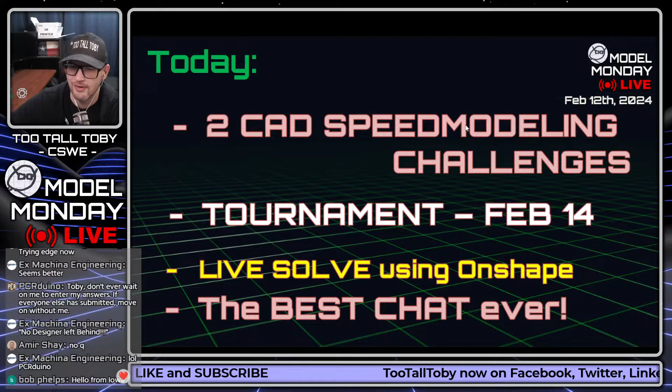So we'll take a look at this in Onshape live today. And of course, we're going to have our speed modeling challenges for all of you. So let's go, let's get into it here.

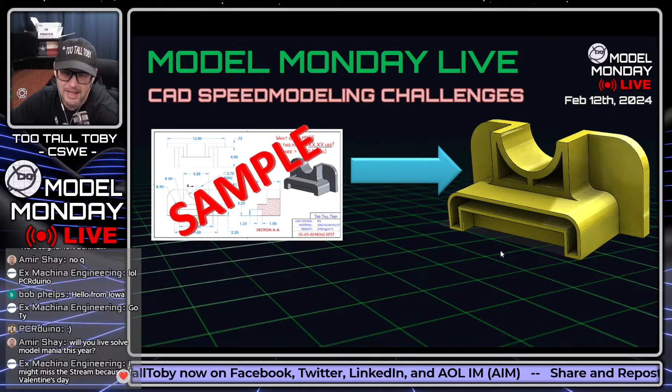We're going to take a look at this sample file. This sample file is going to show us what we're going to be doing today, which is showing you a 2D print and asking you to calculate the mass and then enter the answer in the chat. Once you know what the mass is, enter that down in the chat. The basic rules are that you can use any CAD package as long as you can input the density and output the mass.

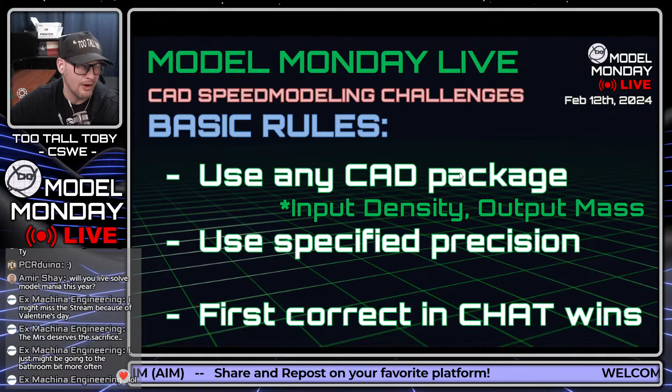Make sure you use the specified precision. I think the prints today are all in millimeters in whole units, so I think you're okay there. And the first correct answer in the chat will be declared the winner. We'll win the points, get on the leaderboard for February on the Model Monday Live webpage.

Here's the units that we use. If you're here for the first time, you might want to take a screen capture of this page. Grab the unit system, grab the units, grab the densities, especially because the densities are different for the different CAD packages out there. So you want to make sure that you have a material, custom material.

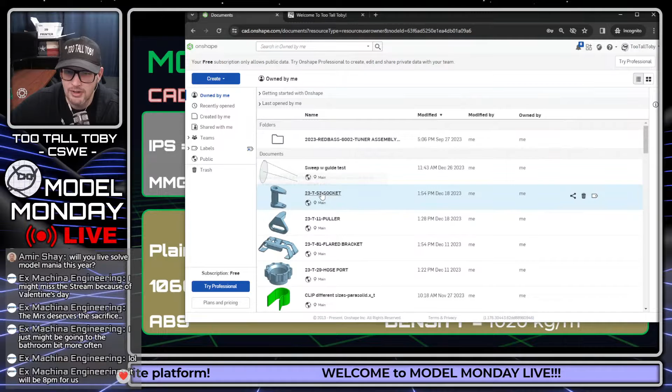You'll see a little bit later in the presentation, we're going to be doing some live Onshape here. And we're going to see that in Onshape, what I've done is I've gone into my materials library and assigned a custom material. So I've got a materials library here. You can see there's the standard Onshape materials library, but then there's also a custom TTT library where I've got my ABS, 1060 aluminum, and plain carbon steel.

So this is something you're going to want to make sure that you do for your CAD system, so that you've got a reliable source of materials with the correct material density hooked into each of those. So just keep that in mind as we are going through these Model Monday Live challenges.

Karam is exactly right in the chat, saying in my Autodesk Inventor, I don't have 1060 aluminum. Yeah, exactly, you're hitting the nail on the head there, Karam.

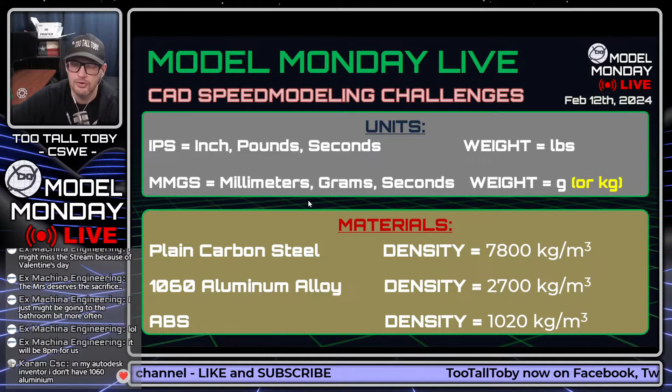So what you want to do is make sure you create a custom materials library, and that way you can add these materials with these densities. Otherwise, you're not going to be coming up with the correct mass. So custom material, how to create a custom material - very important skill for all engineers to know how to do, because it will come up in your career. So make sure you know how to do that, make that custom material, and then you'll be able to use that over and over again.

In the meantime, you could manually input a density. Most CAD packages let you do that. I don't know how to do it specifically in Inventor, but I'm sure that there's a way to input a custom material density for the model in question.

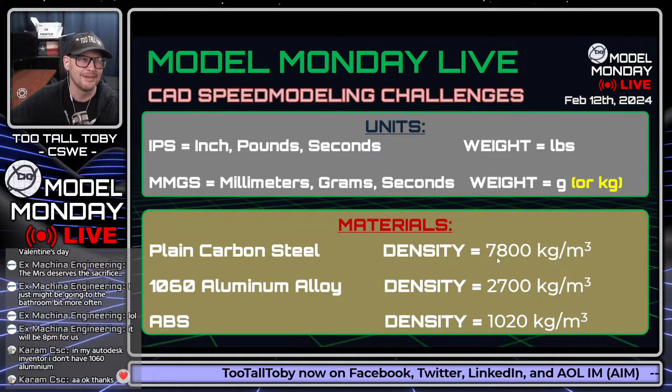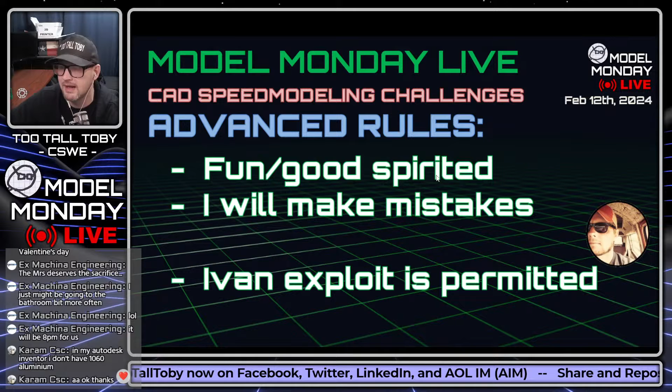All right, the advanced rules are this is meant to be fun and good-spirited. I will make mistakes from time to time, and the Ivan exploit is permitted if you happen to find a spot to use it. This first model we're going to get into here is going to begin as soon as I go to full screen. You're going to take a screen capture, move it over onto your second screen, and attempt to create this model. And this challenge begins in 3, 2, 1, go.

Ali Ammouri is here. What's up, Ali? Welcome, welcome, great to see you here in the chat. Says hello, everyone. Hello, my friend. How are you? And welcome to the chat. Thank you, thank you, thank you.

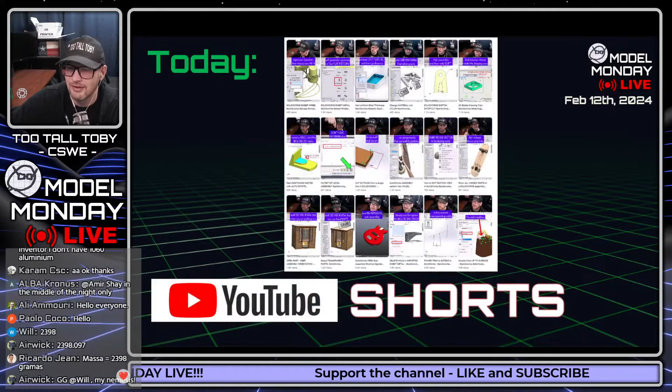First of all, the shorts experiment continues. It continues to grow, like a fungus, just continues to grow. Every week we look back and we got 7 more. And that's because we're doing a new short every single day.

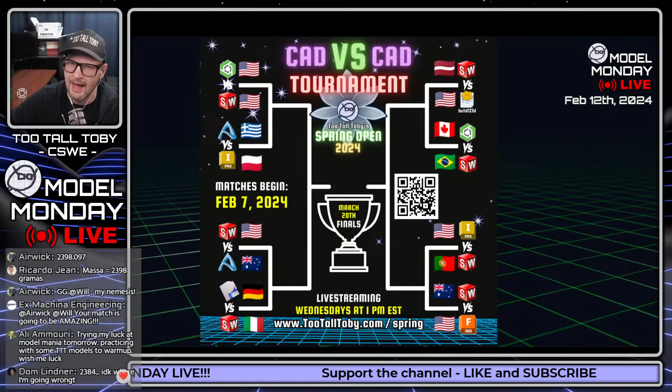The Spring Open tournament has officially begun. We got to watch last week as our friends Imants and DustyTechKnow squared off, and then we got to see Mr. Alex go up against Jern. They were such awesome matches, so excited to see those going down.

And I got your message on Discord, Jern. I can't remember if I responded to you or not. It was a little bit of a crazy weekend with the camping this weekend, but it was a great weekend, and I will definitely get back to you. We're gonna have Jern on as a special guest doing some build123d.

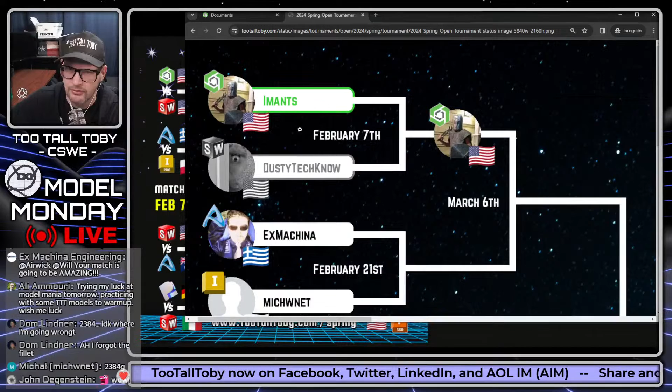If you didn't get to see that, be sure to check it out. Go to TooTallToby.com, take a look at the page Tournaments Spring, or TooTallToby.com/spring, and click on this flyer. When you click on it, it actually shows you the live update of the tournament. You can see here that Imants was able to emerge victorious against DustyTechKnow, and Mr. Alex was able to emerge victorious over Jern.

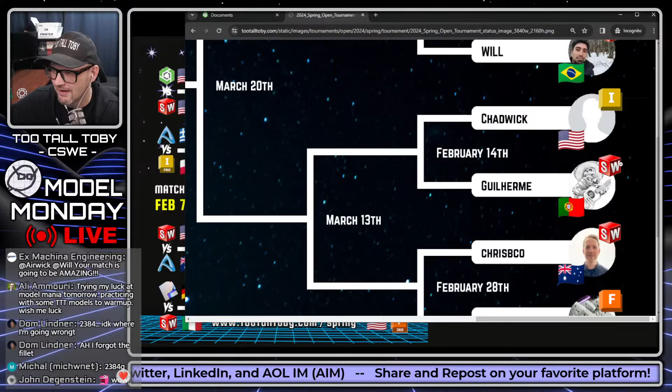So our next matchups are going to be next week. We're going to see Dom using SolidWorks going up against Ty using Alibre, and we're going to see Chadwick using Inventor going up against Guilherme using SolidWorks. Very, very excited to see these matchups.

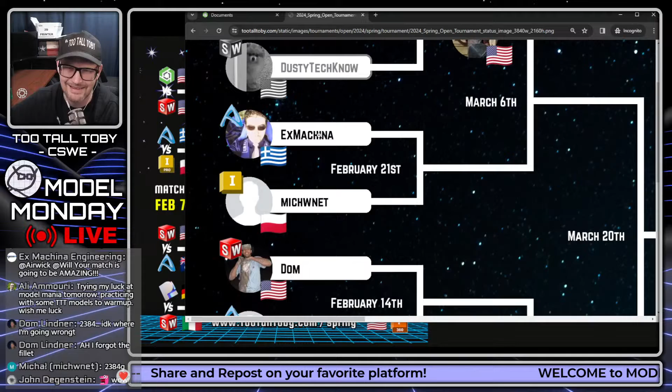We got Michal michwnet in the chat, and he's going to be using Inventor here in a couple of weeks, February 21st. Very cool, I just saw his answer come in, and he's here on the tournament bracket, ready to rock. And of course Ex Machina also in the tournament bracket and in the chat today. We can see some friendly discussion going on amongst the people in the tournament.

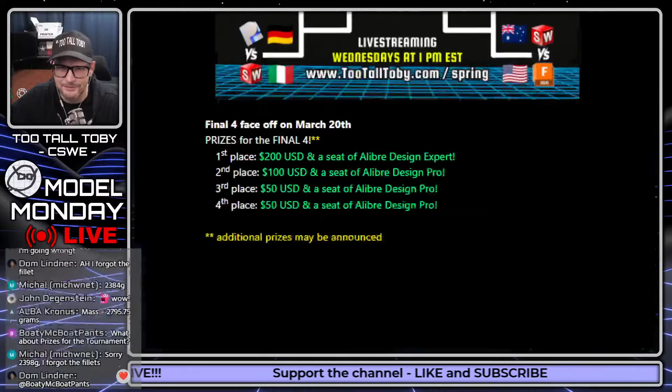First place, $200 USD and a seat of Alibre Design Expert. Second place, $100 USD and a seat of Alibre Design Pro. Third and fourth place, $50 each and a seat of Alibre Design Pro.

How cool is that? So we got some pretty good prizes here for this tournament. Good luck to all our runners. Ex Machina says that's amazing. I agree, that is amazing. Awesome prizes here. Very excited to see who emerges victorious in this tournament.

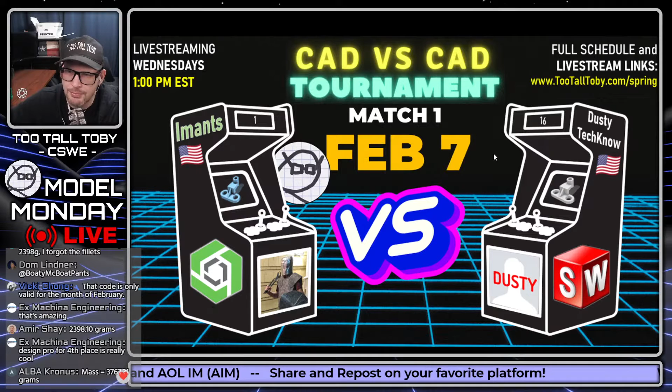Like I mentioned last week, February 7th we saw our kickoff match, Imants versus DustyTechKnow. We saw Mr. Alex versus Jern. Really, really fun matches. Full live stream is on the website, on the YouTube channel, you can check that out.

This week, in 2 days, February 14th, Dom using SolidWorks versus Ty using Alibre, and Chadwick using Inventor versus Guilherme using SolidWorks. Very excited to see these matchups on Wednesday. Be sure to check them out and share it with your friends in the world of CAD. We got lots of good matches coming up in this tournament.

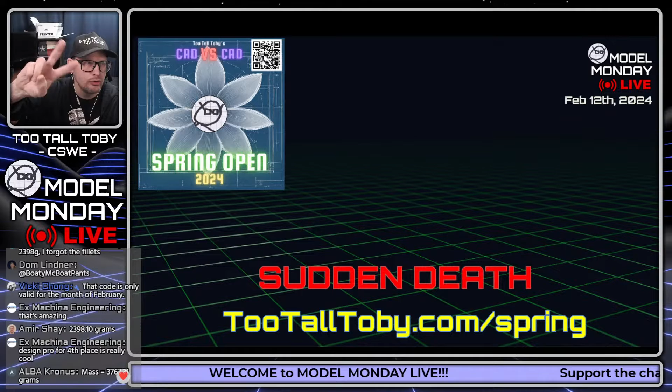16 people, Wednesdays at 1 p.m. No sheet metal, that's the big difference to the rules in the open tournament. And of course we are also implementing sudden death in this tournament. If there's two matches that go to a push, then we go into sudden death. We have some special rules to make sure that the tournament keeps moving forward.

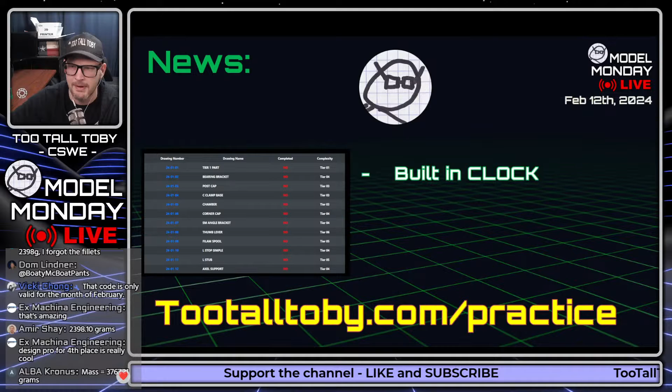I mentioned that I posted a video this morning with practice models updates. So if you go to TooTallToby.com/practice, you'll see that all of the practice models are available. There's a built-in clock, there's a tiered level difficulty, there's a leaderboard, you can track your progress, and it's mobile friendly. So you can check out TooTallToby.com/practice and get all of your 2D to 3D fixes in there.

He says, I'm Mr. Alex from a notebook. Oh okay, cool, all right good. Double practice, I like it. Double practice, I like it.

So yeah, you guys can check out TooTallToby.com/practice. It's an awesome website, it gives you a chance to really get in there and continue to hone your skills. And we are adding new models every week to that website. So check it out and keep coming back and checking for more.

And finally I got to mention training. We got TooTallToby.com/training up and running. If you go here, you can see that we currently have 4 classes, although we're about to add 2 more to this list. And you can also see that we are scheduled to run our first class. We have 2 students signed up so far, but we're looking to get some more into that class. It's going to run on Thursday, February 29th, and it is Toby's Advanced SolidWorks part design.

So we do advanced fillets and chamfers, splines, fit splines, 3D curves, helices, split lines, 3D sketching, sweeps, lofts, pierce constraint, delete face, move face, multi-body commands, advanced patterns, and more. Lots more.

This is a live class with me, so it is live training. It's over the web, but it's not pre-recorded videos or anything. So you also get the ability to ask me questions. You get access to an exclusive area of Discord, and you also get the training files, a training manual with this awesome cover, and the certificate of completion. So be sure to check that out.

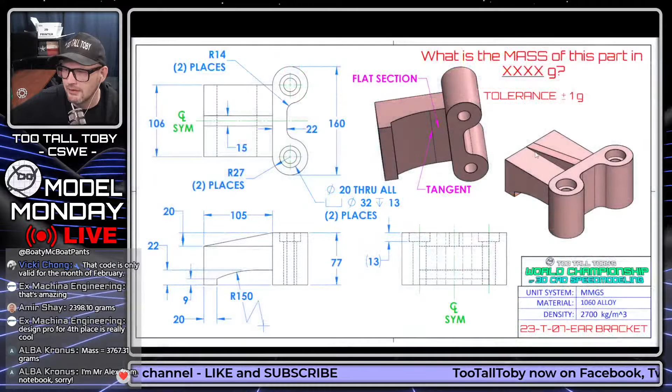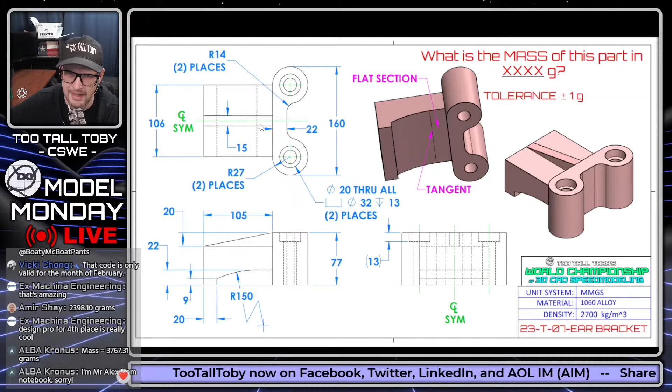All right, our first answer. A little bit of an easier model, I don't have this one tiered yet. I think this would probably be a tier 4 model. We could get most of this geometry probably in one sketch, and then maybe have to do a second sketch to come in from the side, but other than that it's basically a one sketch model. You'd have to know how to use your contour selections to do it if you were going to sketch it all from the top, and you'd have to know how to do some slightly more complex relationships like tangency and dimensioning to the tangent points to make things a little easier.

But let's take a look at what our amazing chat came up with as far as an answer goes. Actually, I think we can just leave this here and do one of these. Oh yeah, love it when it works. Love it when it just works, such a good feeling. All right, I will move this over a little.

All righty, let's go, let's see what we came up with. I saw an answer coming from Will. Will is going to get on the board possibly this week or stay on the board. Wait, did Will get a point last week? Let's look here, Model Monday Live, February. Will is already on the board for 1 point. Will and Victor K. Let's see how it goes today.

Will comes in with an answer, 2, 3, 9, 8. Very nice. Will is in the tournament as well, guys.

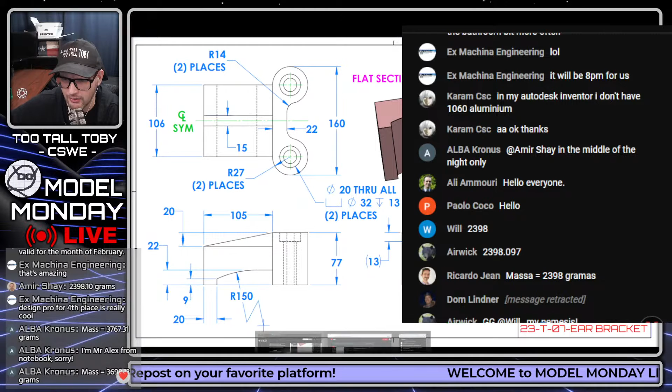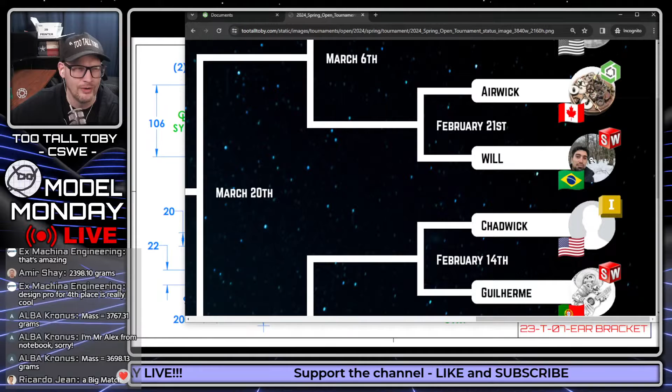All right, this is what I like to see. Oh, I don't know if you guys could see that, I might have had it blocked with the chat, sorry, let me do that again. Here we go. February 21st, Will versus Airwick, Canada versus Brazil. I like it, I like Airwick's user logo there too, that clock, all the clock pieces, that's pretty cool. It's kind of ironic too that Airwick is in Canada, but Will has the image with all the snow and the trees, you'd think that would be up in Canada with all the snow and the trees. So all right, cool, I'm excited to see that matchup. I think we're all very excited to see that matchup.

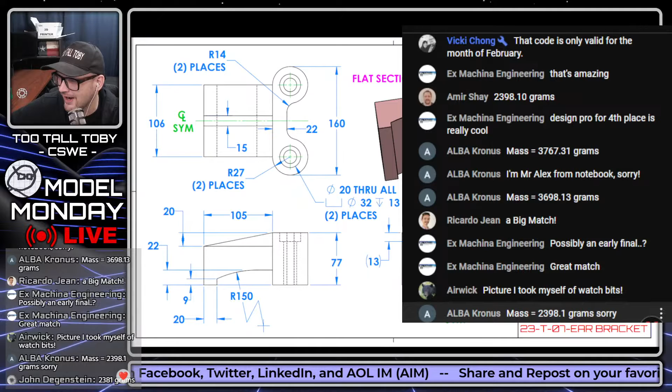Let's see here, Will comes in with an answer, 2, 3, 9, 8. Airwick right behind him, 2, 3, 9, 8. Ricardo Jean coming in 2, 3, 9, 8. Very nice. Dom coming in down here, 2, 3, 8, 4. I don't know where I'm going wrong. Hey, it's all good, you can correct as many times as you want here in the Model Monday Live episodes. You don't get that luxury during the tournament, but you do during Model Monday Live. Michael coming in 2384 as well. Let's see here, Alba Kronus, Mr. Alex coming in 2795, mixing it up, I like it. Let's see here, Michael revising 2398. Very nice. Alba revising. Amir coming in 2398. And Alba coming in 3767. Very nice. 3698 revising. I like it. And finally 2398 says grams, sorry, don't worry about it, you can do it as many times as you want. And look at John coming in here 2381 as well, I like it. Lots of diversity here as far as these answers go.

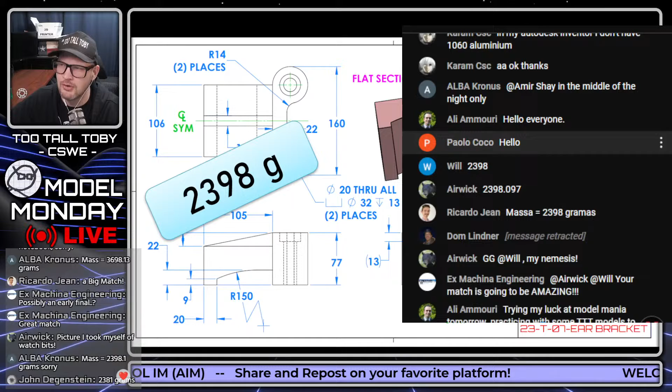Let's see what we ended up with as the correct answer. The correct answer is 2398. So that point is going to go to Will, taking him up on the leaderboard, 2 points for February. Very nicely done, Will. Let's all give Will a GG in the chat and a GL on Feb 21.

GL Will on Feb 21, you're going to destroy that other guy. Just kidding, just kidding, Eric. All right, GG to Will.

Congratulations, very nicely done, that was speedy. Boaty McBoatPants saying, wow, look at that leaderboard updated already. That's very nice, Boaty McBoatPants.

I like it, let's look here. Model Monday, look at that. Will's already got his point here. It's like we got AIs running in the background, scrubbing this thing and coming up with our answers right away for us. I love it.

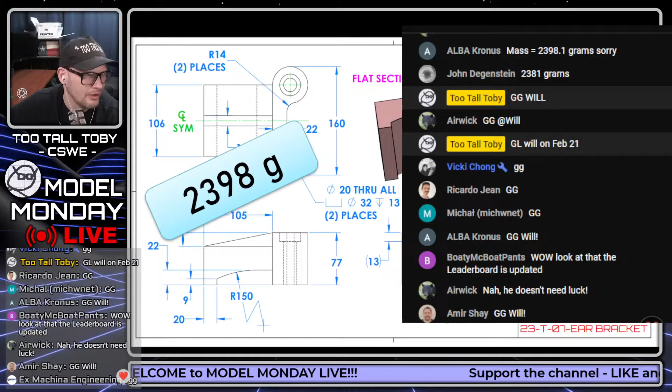All right, let's get into our second challenge here. And guys, guess what, we got a new model for you here. Model Monday Live, I figured it was going to be a little bit light today. I know there's some conferences going on today, this week, so I figured we'd be a little light.

So I figured something special for all of you. We're going to do a brand new model here. This one doesn't come from a past tournament, doesn't come from a past episode of Model Monday Live. Brand new, just for you. I tagged it as a tier 5 model. I don't know, you guys are going to have to tell me. I thought it was tier 5 because it has some trickiness to it. Whenever there's trickiness, it kind of gets bumped a little bit. So good luck, here we go.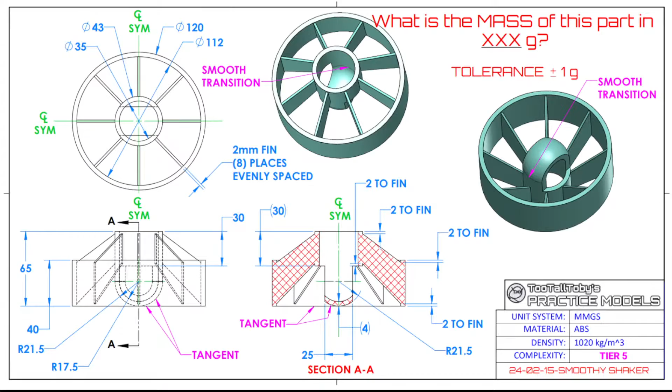All right, let's get back into it here. Here we go guys, Model Monday Live continues. Good luck to all of our runners today.

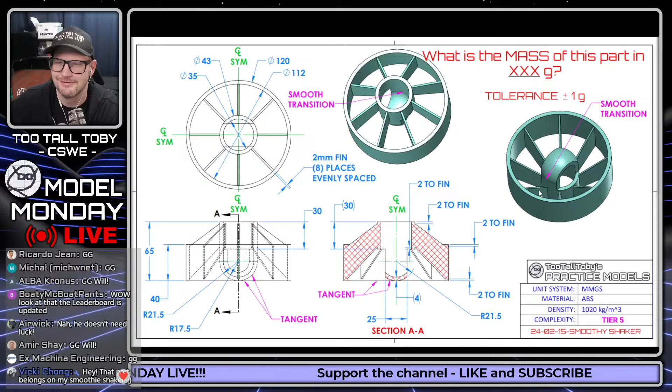Now I have mentioned conferences a couple of times this week, but sometimes it's time for an all-new type of conference. We are in the process of putting together an all new type of conference. I've mentioned this the past couple of weeks, it's still in a codename phase, codename SolidBox World, but this is going to be something special. This is going to be representation from multiple CAD systems getting together, talking about the differences, talking about the similarities, talking about what makes one CAD system maybe a better choice for you, and a really unique event here to kind of compare and contrast multiple different CAD systems. So be on the lookout. SolidBox World, put it in your calendar for all of Q4 2024.

Just say sometime in here, we're going to have SolidBox World. I got to mark this in my calendar, I'm marking off the whole quarter. We are very excited to get this all locked down to officially announce. I think the official announcement's going to come here in another week or so. But for now, you Model Monday Live crew, chat crew, you guys always get the inside scoop.

Da Vinci is here in the chat. What's up Da Vinci, welcome, welcome. We're just doing the second challenge, so if you just roll back the video a little bit, you will see the second challenge has begun.

And here we go, let's keep going on here. What are we going to do today? Whoops, this isn't right, hold on, we're doing a quick change here. We're already at this part. We are crushing this schedule today, this is awesome, I didn't realize we were already this far.

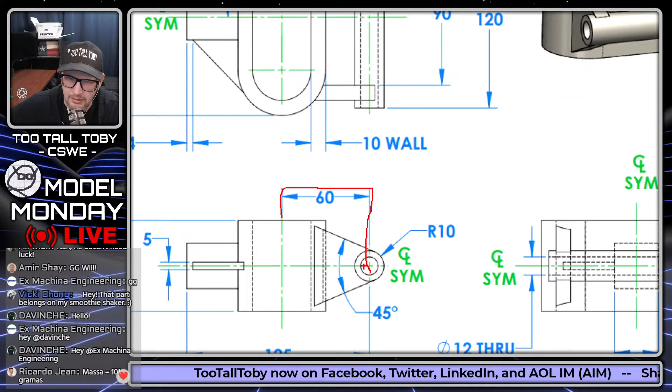Like this dimension here, this 60 is coming off of the center of that slotted area, and then this 125 is coming off the back of that. So you could almost say that this dimension here is also coming off of that centered location.

So I think that because of that, it would make sense to have the origin, the center of the part, maybe located here. And the way that you determine that, the way that you establish that, is just kind of by experience, but it's also by looking for things like, is the model symmetric? The model has symmetry in this direction, so the origin's probably going to be somewhere along this line.

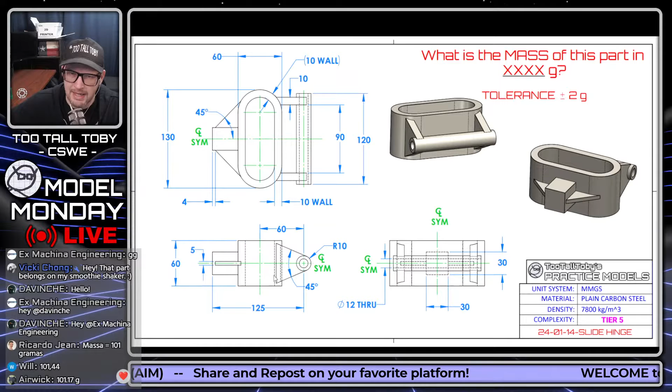And then looking for key anchoring dimensions, like we talked about a moment ago, that 60 and the 125 dimension are going to be anchored in on that point. So we could say that we're going to put the origin here, and once we determine that, we could really create a lot of this geometry on that initial sketch plane.

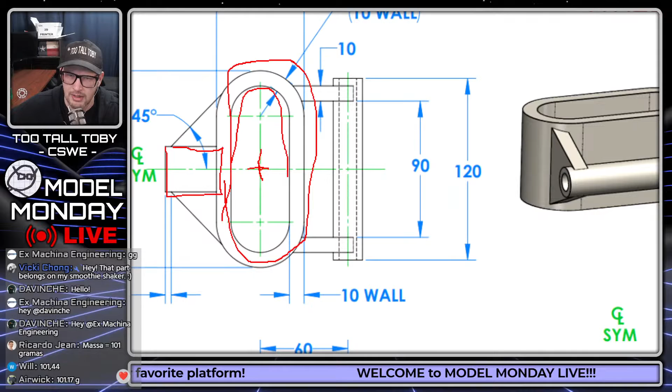For example, I could create this rectangle shape here in that initial sketch. I can certainly create these two slotted shapes here in that initial sketch. And I could also create the sketch for this rib here.

Now, I think I'm going to take advantage of symmetry, and I'm going to mirror that rib across, so I don't really have to worry about drawing it twice. And if that's the case, I could also take advantage of this shape here and mirror it across.

So I think I'm going to create this rib here, and then also create one of these kind of triangular shapes here, and then mirror both of those features. Once I mirror both those features, the only thing left to do is going to be to create this boss here.

The final thing I'm going to say about a model like this, and again this just kind of comes from experience, is that I think what I'm going to do is create this outer shape first, and extrude it as a solid.

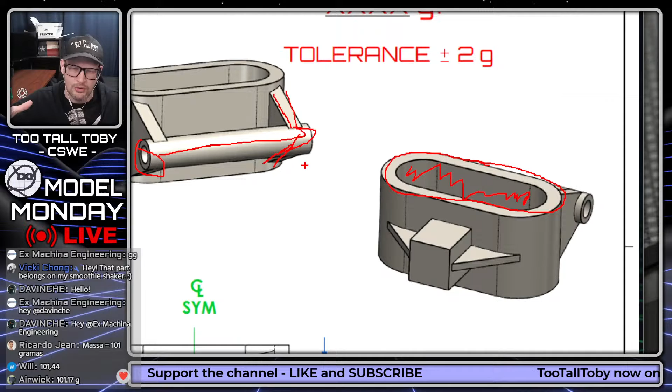And then later in the model, towards the end, I'm going to go through and cut this inner shape. The reason you do that is because it just makes it easier for you to overlap geometry onto that inner wall. Sometimes it's not necessary, especially with a model like this. When you've got a very thick wall, it's probably not necessary, but it is kind of a good best practice, and it's a good technique to share here during this Model Monday live solve.

I know that I took a couple of minutes there to come up with a game plan, but I think it's definitely important, and it's going to help me throughout the rest of the design process. That's why we always do that, we come up with a game plan, and then if we need to pivot along the way, we certainly can. I'm going to take a screen capture of this and move it over to my second screen.

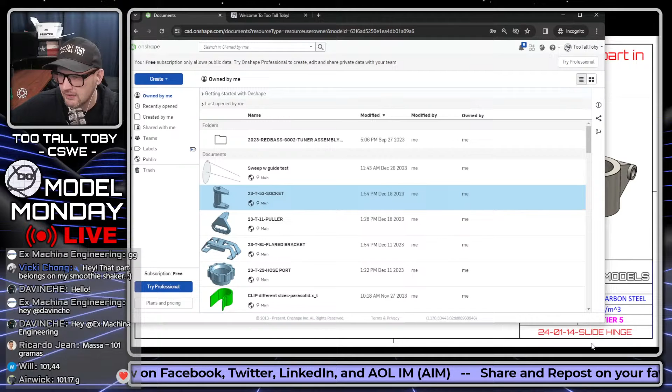I'm going to get into my Onshape modeling environment here. Onshape is entirely browser-based, so it doesn't matter what operating system you're working on. I'm building a second computer here to use in a more mobile environment, and it's really nice to have Onshape on both computers. Really, it's not on either computer, it's on the browser. It's just nice to jump from one computer to the other and keep my place, not having to worry about transferring files or anything like that, or my learning - all of my Onshape learning is in the same account. It's a real nice advantage of being entirely browser-based.

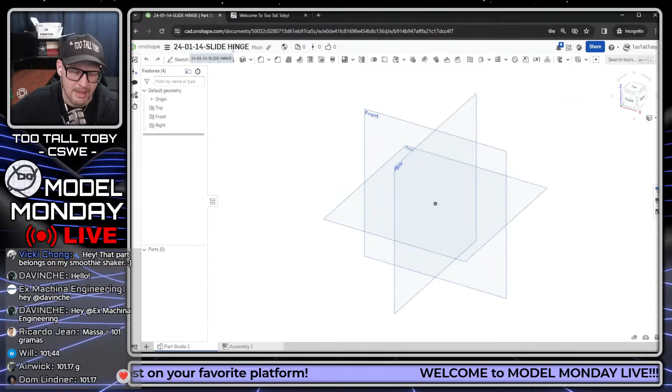So I'm going to create a new document here. I'm going to call this document 24-01-14-slide hinge. If you are an Onshape user, this is being created in the public space, so you can search for this name and find this document, and look and see how I built this. Just like we talked about in the game plan, I'm going to start out by creating a sketch here on the top plane.

Once I get into that sketch mode on the top plane, I'm going to start out by creating that slot geometry, that double slot geometry, so the 60 by 130 slot geometry.

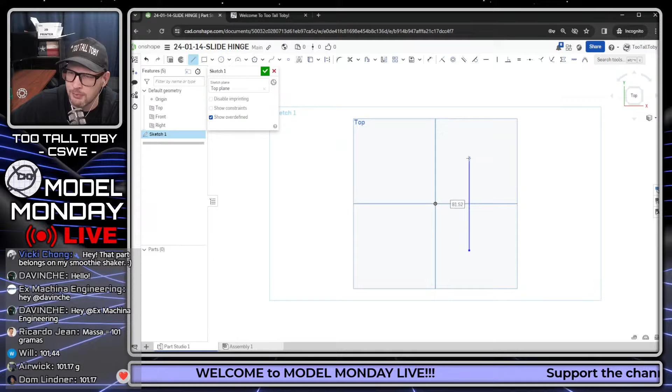To create a slot in Onshape, we start out by creating the center line. This is going to be 130, really minus 30 for the radius on one end and minus 30 for the radius on the other end, leaving us with a 70 millimeter long line.

Then I'm going to take that line and choose this command up here, slot. We fly out the command for offset, and then we can choose the command for slot. At this point, we can click in the background to finish that slot command, and then we can change this - this is a diameter dimension, so this is going to be 60, the diameter for that slot.

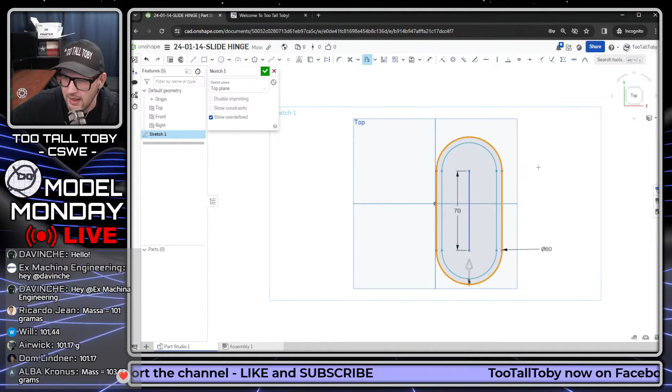We can also, at that point, go into an offset command. So I could do a right mouse button select and say tangent connected edges. Then from there, I could jump into an offset command, and this is going to be an offset at a distance of 10 millimeters to capture that wall. Now I can just pick this line, pick the origin, and then press Shift M, which is the newer hotkey for midpoint.

In some CAD systems at this point, we would have to take this center line and make it for construction, but we don't have to do that in Onshape. Onshape is kind of pre-cooked to work with contour selection, multiple contours in a sketch. So it just works.

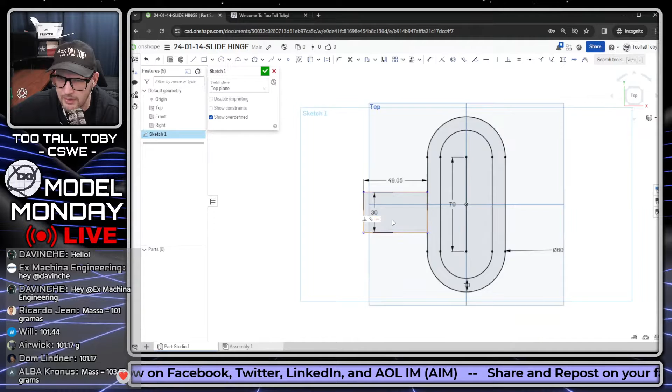Now I'm going to create this sketch out here for the rectangle. I don't know what that dimension is, so I'm just going to leave it whatever it happens to be - I'll just press enter. Then for this dimension, this is going to be 30. And there we go.

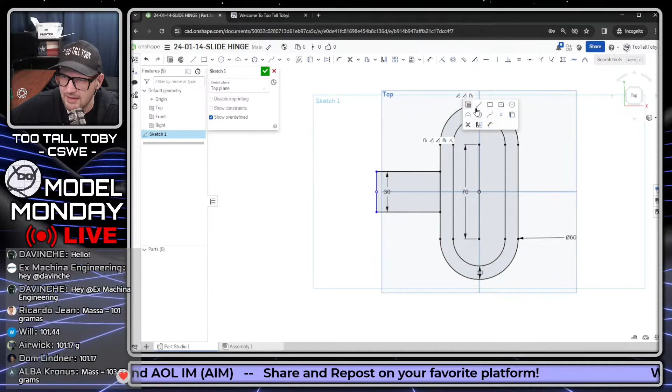Then what I could do is align this rectangle onto the remaining geometry. There's a couple ways we could do this. A lot of times I'll just drop in a point here, and then take that point and the origin and make them horizontal - just take those two and press H. Then this dimension, that's not the correct dimension - it's going to be a dimension from the origin to that line, and that's going to be our 125 minus 60 that we talked about down in that front view.

Now the final thing that I need to sketch here is just a line that I'm going to use for the rib command. That line is going to have a dimension of 45, and then it's going to have a distance here of 4 millimeters.

Now, the truth is that I like to keep my sketches simple, and this is kind of pushing it for me. This is getting a little too complicated. If something goes wrong, I'm going to probably need to spend a lot of time troubleshooting, so I really don't want to go too much further than this with this sketch, or make it too much more complicated.

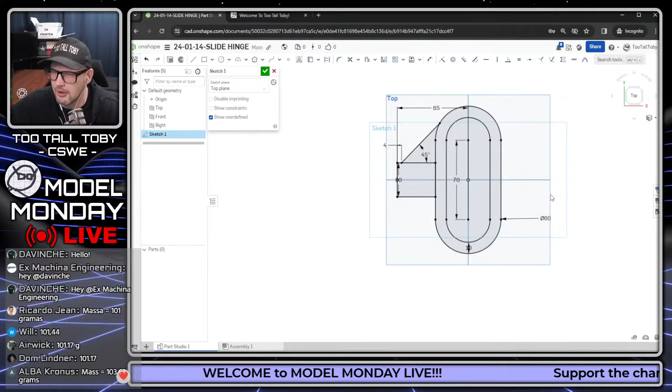Certainly I could get over here on this side of the model and start sketching that other geometry, including it as layout geometry as well. But again, I like to keep my sketches simple. I don't want to go too deep into an overly complicated layout sketch for this model.

So I think at this point I'm going to jump into my extrude command and choose the geometry to extrude here. I think I'm going to choose this region and this internal region like we talked about before. That's going to come up to a height of 60, and I'll press tab and get down here to symmetric, then press enter and finish out that part of the command.

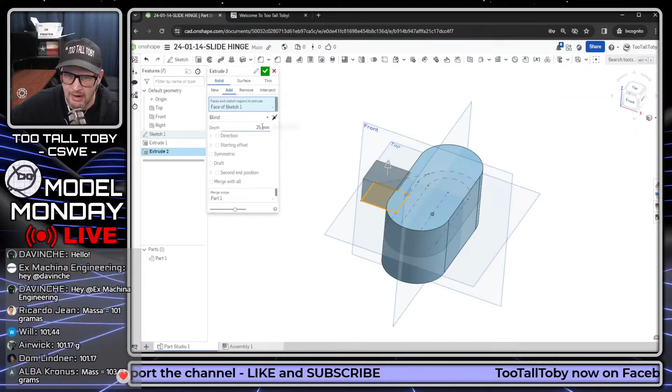Now I can show that sketch. So over here in the tree, I'm going to show that sketch, and then use that sketch again to do another extrusion. This time the extrusion is going to come from this rectangular area, going to a height of 25. Again, I'll press the tab key here and tab down to symmetric, then press enter. And that creates that kind of rectangular shape sticking out the front.

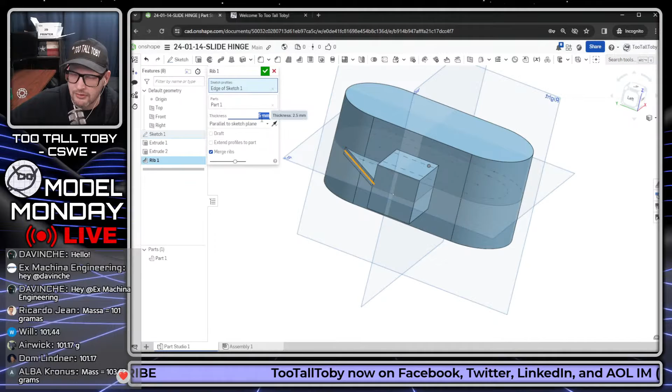Now I'm going to select this line here and jump into a rib command. By pre-selecting that rib, it just takes me right into the command. That's going to be at a thickness of 5, and we can see here that now allows me to create that rib with that thickness of 5. Boom, done with that feature, ready to move on.

So now we're going to jump into those kind of triangular shapes that were sticking out the back there. We need to create one of those triangular shapes, and then we'll be able to mirror that. Once that's mirrored, we'll create that final kind of circular boss running through there.

So I'm going to take the front plane, right mouse button on the front plane, and choose offset plane. This is going to be an offset at a distance of 90 over 2, and we're going to offset the opposite direction. And there we go. Now we're going to select that face and begin a sketch, and I'm just going to get normal to that sketch plane to create this geometry.

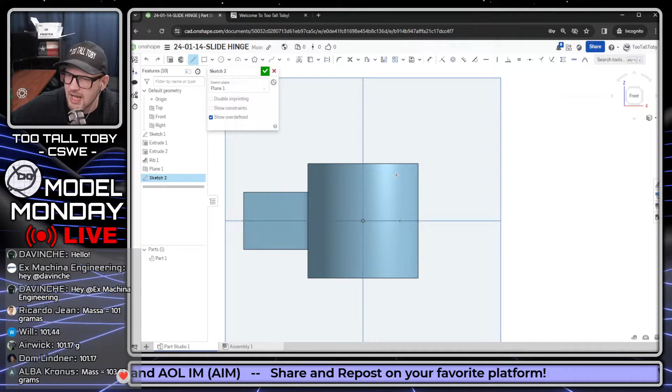So for this geometry, I'm going to begin a line. I'm going to come down, come back, kind of touch the end point, jump into a tangent arc, and then create another tangent line coming off of that. I'll just connect those two. We're going to make this vertical, so I'll press V there.

We'll take these 2 points and make them vertical as well, and then take the origin and this point here and make them horizontal. That should establish, because I made those 2 points vertical — this is a little trick when it comes to tangent arc, line, tangent arc, so line, arc, line.

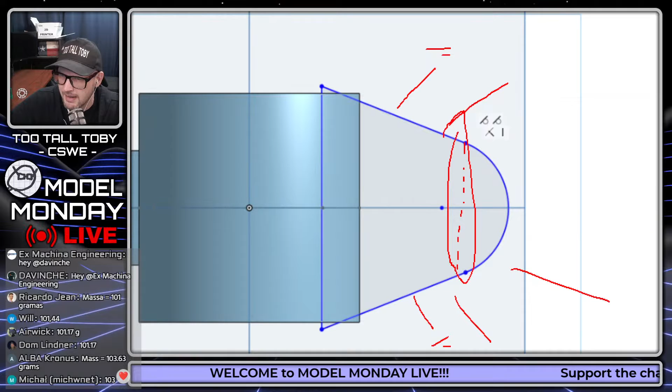If you take these 2 points here and make them vertical, that will give you essentially a symmetric relationship. You could also take these 2 lines here and make them equal — that's another way of doing it. But you can also just take these 2 points here and make them vertical. It's a nice, quick, easy way to create pseudo symmetry between that — it's like a geometric symmetry.

So now this is going to have a radius of 10, and the angle here between those 2 lines is going to be 45. Now the distance from this line to the center of that arc is going to be 125. And now this is where it's kind of nice to have the internals of this model still solid.

Because I don't really need to worry about where this lands — in fact, what might make the most sense would be just to create a coincident relationship between this and this. So if I make those coincident, now I know it's going to be buried inside there, but it's never going to stick out the top or out the bottom.

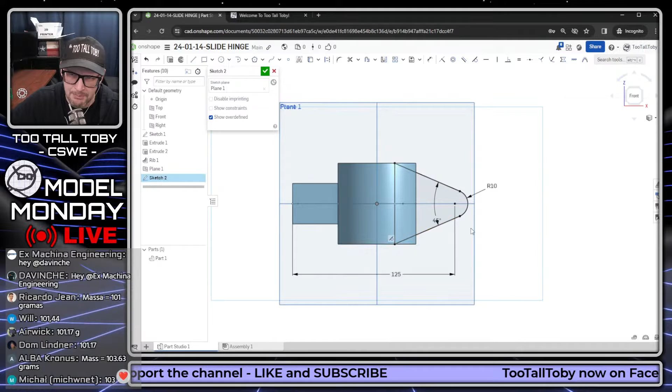And then what I could do is jump into my extrude command. So we could take that and turn it into an extrusion of 10 millimeters, and that's going to go the other way.

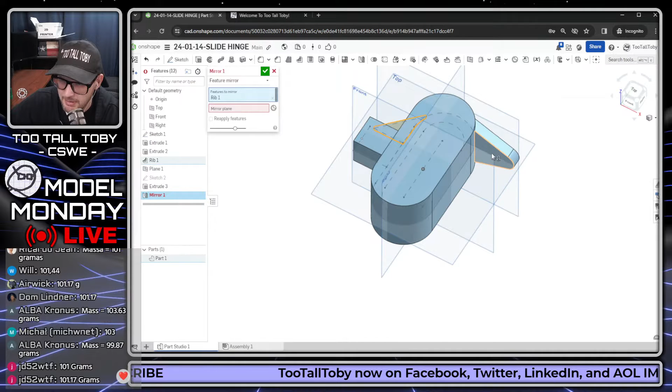And now I'm ready to jump into my mirror command. So mirror, and this is going to be a mirror of features. I really could mirror the whole part as well, but I'm just going to do this as features. So I'm going to mirror the rib and that triangle shape, and the mirror plane is going to be the front plane.

We can see that these are showing up in red, and sometimes if they show up in red in Onshape you need to check this check mark here, reapply features. It's nice, Onshape gives you that color coding, like hey this isn't going to work - if you hit the check mark you're going to end up with an error. So I click reapply features, and now I hit the check mark, and now boom, we are good to go.

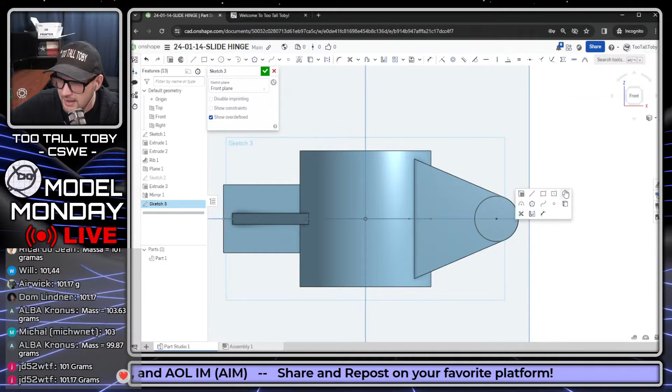So now at this point, I could go front plane, begin a sketch, just get normal to, just because we like it normal to. And then we're going to say that these 2 arcs here are equal and concentric - we'll make those 2 concentric, and we'll also make those 2 equal. A couple of ways we could do that. And then we've got our internal arc there as well, and that internal arc is going to be at a diameter of 12, I think. Yep, 12. Thought I saw that earlier.

And then we'll do an extrude there, and that's going to go to a depth of 120. Once again we're going to press tab and get down to symmetric. This could be the whole thing, or we could leave some of it out. The nice thing about doing the whole thing is that one of the nice things about Onshape is you can extrude right from a face. So then I could pick this face, do an extrude, and make that a cut extrude - remove through all, and then I'm just done. It just blasted through the whole thing there. So it's one way of doing it.

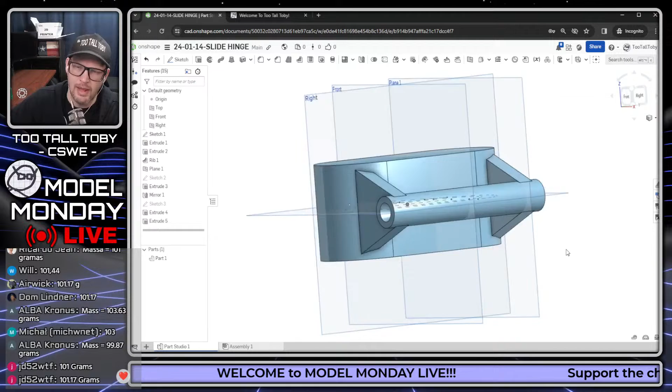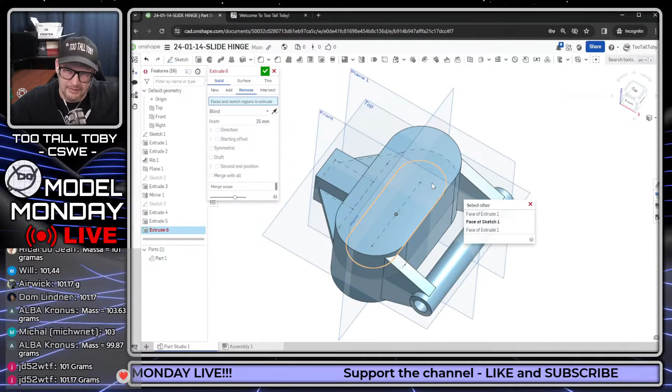Another way would be just to reuse the sketch like we did earlier. So for that final feature, we're going to go into an extrude, and this is going to be a remove. Then for the faces and regions to extrude, we're going to use the tilde key, the key up above the tab key, because that's the select other in Onshape, and that lets you pick a region buried inside of the model. It's a little hotkey, you use that tilde key. So I'll pick there, and that's going to go through all and symmetric, hit the check mark, and there we go. We can do a Shift P to hide all of our construction geometry.

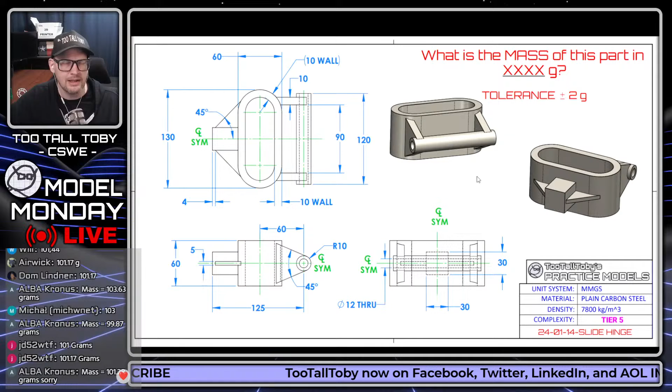So at this point we're going to go back to our PowerPoint. And did we get it correct? Drum roll please, let's see. Did we get it? We did get it correct - we just got it correct on an old slide, but we did get it correct. 2030 grams is the correct mass of that part. So we did it, yeah. GG Toby in the chat, GG Toby, and that is correct. 2030 grams is the correct answer for this model here.

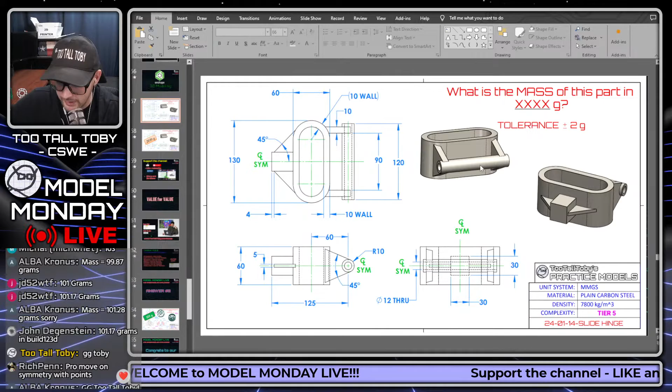Let's fix this real quick, we're going to do it again, we're going to roll that back, guys. So everybody act surprised, all right? We'll get rid of this, put this here, and we'll do one of these. Okay, here we go, everybody back to position one, back to position one, here we go. So we come up with an answer of 2030 grams. And did we get it correct? We did get it correct. Oh yeah, nice job, we did it.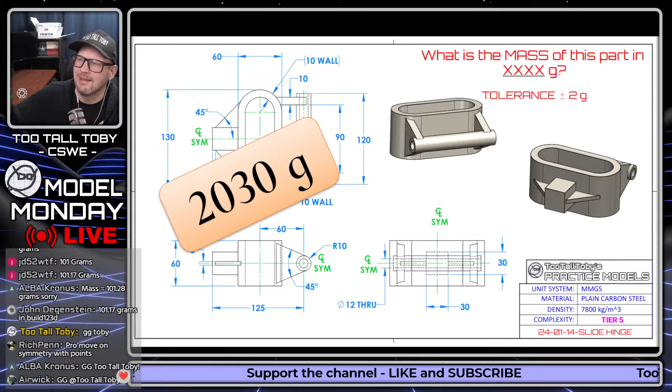So there is your Onshape live solve tutorial for this model, Slide Hinge. I know there were a couple of people asking questions about it in the comments, and I hope that helps. That is how we can do it using the totally free version of Onshape. If you want to check that out, Onshape also has a promotion going right now - if you're interested in getting up to professional, you can get it for 6 months. I'm gonna have some more details on that in the next couple of weeks, so we'll leave that one as a teaser for now. But there you go, and let's go.

Wow, John dropping in a 'feels good man' JPEG. I can't wait to see what that one looks like. Nice job, I like that reference.

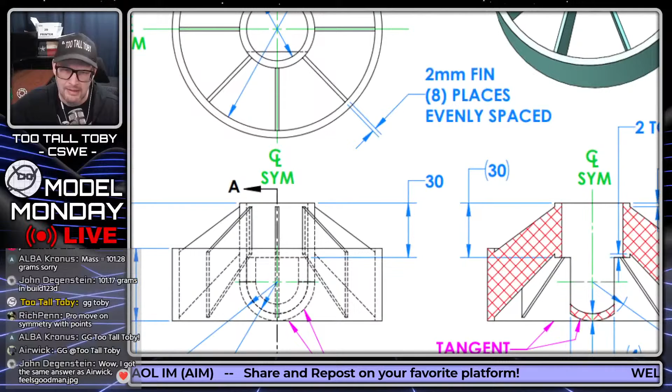All right, and with that, let's get into our answer here for the second one. This is a fun one, I really like this one, the Smoothy Shaker. The way that I did it was I started out with a sketch of 2 rectangles.

Then I revolved those 2 rectangles into that initial shape. Then I went into the side view and created one of the ribs. And once I created that rib, I did that as a circular pattern to get 8 of those ribs.

Then I took a new sketch on the bottom of this surface and did a convert of these 2 circles, convert entities, and then did a rectangle at that width of 25. And then I just took that one section of the sketch and extruded it down.

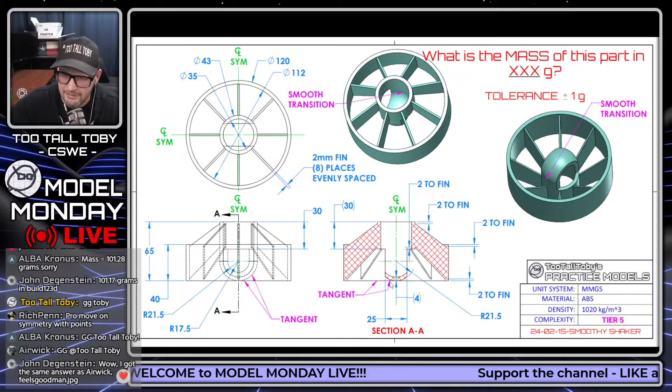The tricky part is trying to figure out how far down that needs to go. The first time I did it, I just did trial and error. The second time I actually did the revolve first. But once I had that one section extruded down, I was able to sketch a center line in the middle and use that shape to do a revolve to create this shape. Pretty cool stuff there.

Pretty cool stuff. JD52WTF is in the chat, welcome, great seeing you in here, it's been a little while, great to see you in here again. Rich Penn is in the chat: pro move on symmetry with points. Oh, thank you, Rich Penn, appreciate it. Really been enjoying watching your content on YouTube also, Rich Penn. Keep it up, keep coming out with those tutorials, lots of good stuff in there.

Alrighty, let's see what people came up with for the answer to this one. The very first answer that came in from Ricardo Jean. Yes, awesome, another runner in the tournament.

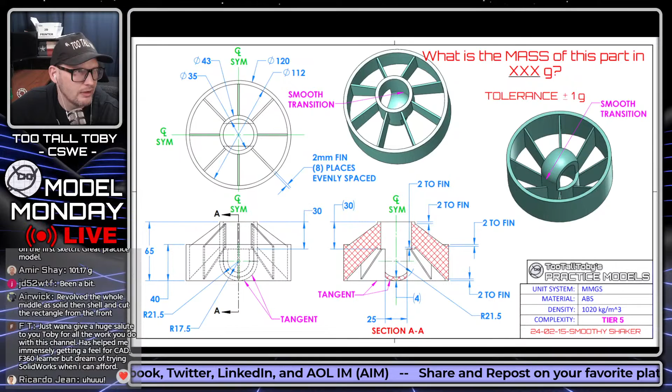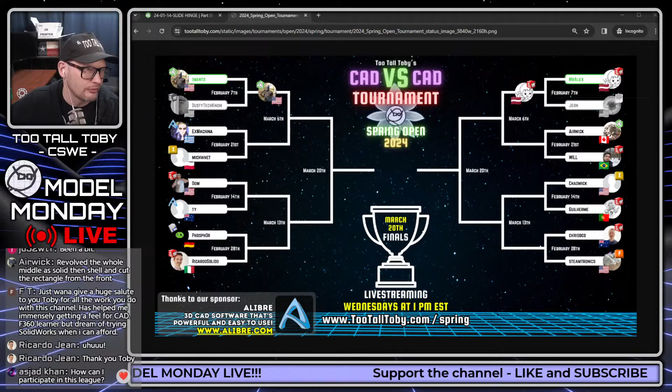And we'll definitely let you know when the next tournament kicks off. All right, what is the correct answer? 101 grams. So congratulations to Ricardo. Nice job, very nice job.

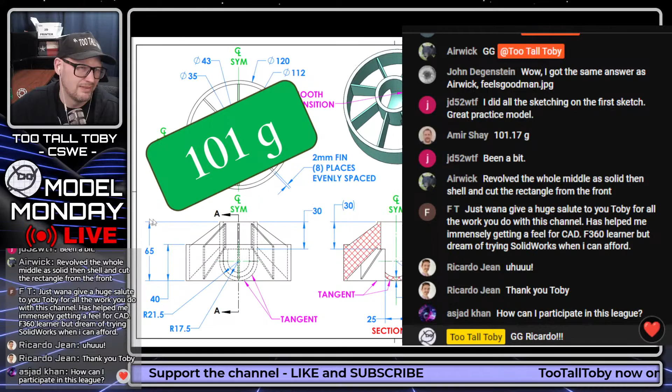Congratulations and well done, good luck on Feb 28th, good luck in your match against Phosphor. And GG, really GG to everybody who did that one. If you tried it, if you got it wrong, if you tried it and you didn't finish, that is not an easy model. It's a really cool model. It is not easy, and GG to everybody who gave it a try. That is a tough one.

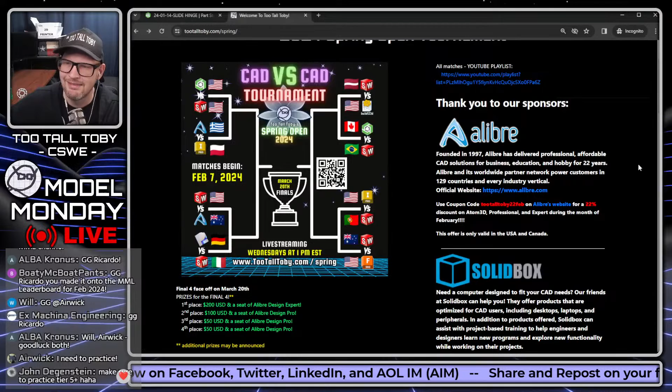Guys, I think that's it. Good place to end, good song to end on. Really good Model Monday this week. Thank you guys so much for joining us. Congratulations to our winners today, to Ricardo and to Will. Congratulations, let's see if the website has updated already. Oh, it sure has, they are on the leaderboard. You can see them right here on the leaderboard. Awesome job, we'll have some more fun challenges in 2 weeks.